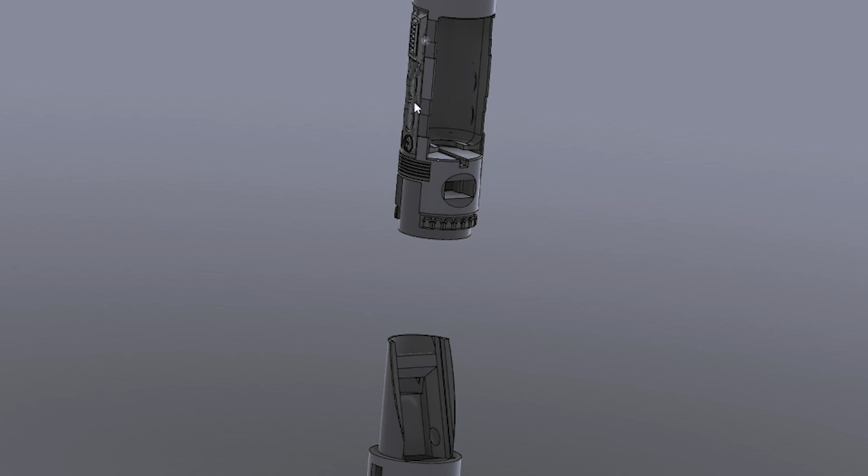So we're going to come into Fusion and talk about the chassis really quick, and then of course we will come up top and do a demo. Okay, so here is the chassis. Yes, that is the whole chassis. And this upper part is not even the Proffie holder. Let's talk about the bottom first. This is where the Proffie board lives.

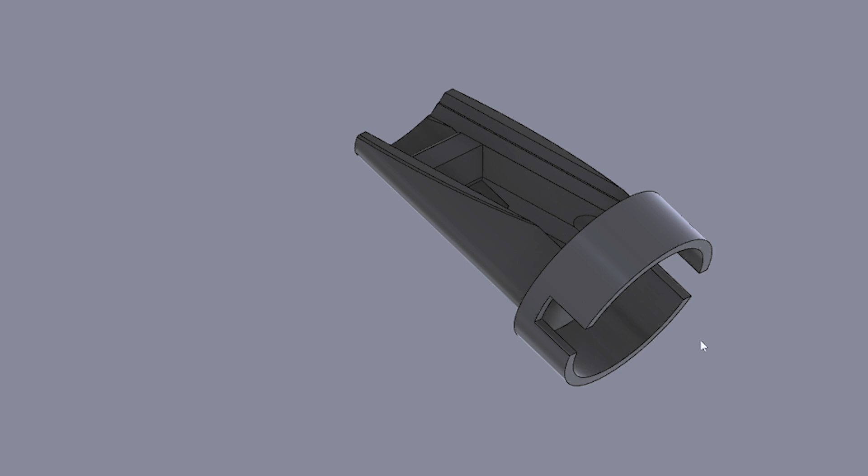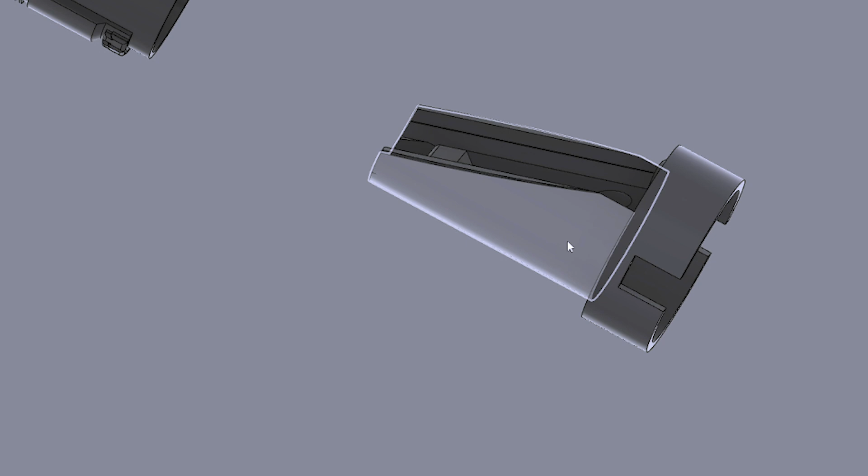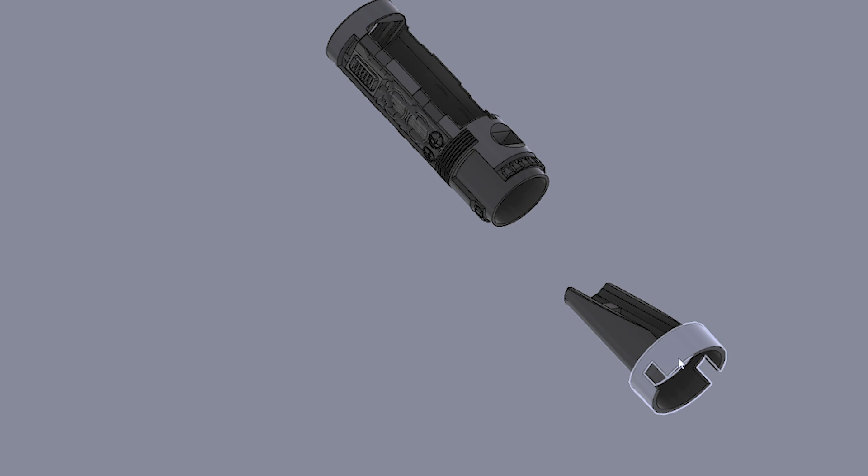One of my first concerns was having the board this close to the speaker. I was afraid we were going to get some false clashes, but to my surprise, after everything was installed, we don't get that. It works. It's very tight. This is the only amount of space that we have in the pommel area of the crystal chamber. You wouldn't be able to put a Proffie board up here; you just would not have room to stack it with a battery, and vice versa. A battery would not fit safely, in my opinion, in this bottom area with a speaker. So this is the solution I chose, and I'm pretty happy with the result. Very tight in this area.

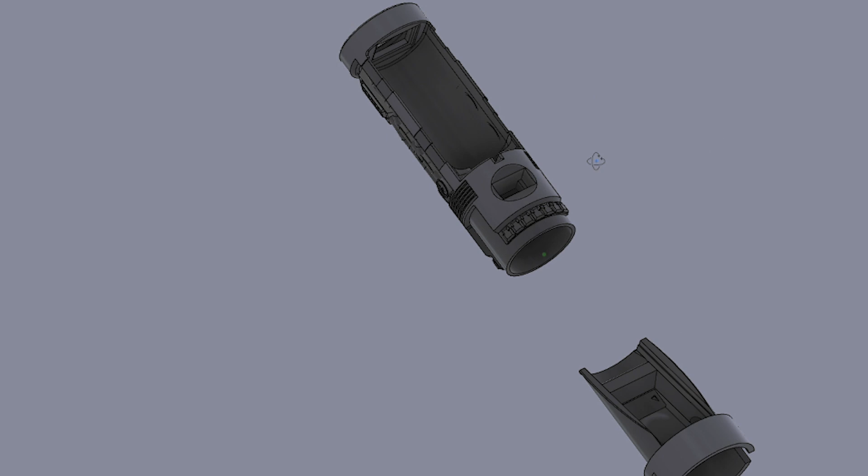So I wire up my Proffie, and I bring all of my leads past the exposed crystal chamber into the upper section of the hilt. These two indentations are where the chassis slides into the actual upper part of the crystal chamber. And then we've got our battery tray here. I did add a kill switch. Getting at the battery is not actually difficult, but because we have an open grip, I wanted to get a kill switch in that area so I wouldn't have to slide the entire core out to turn it on and off.

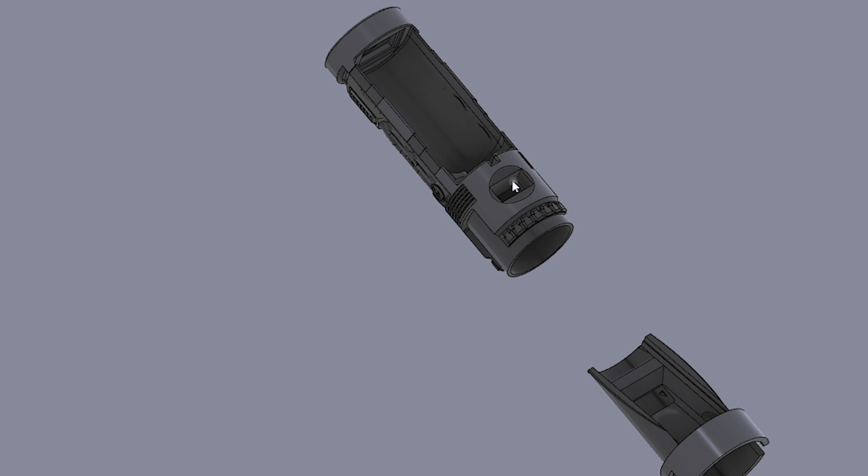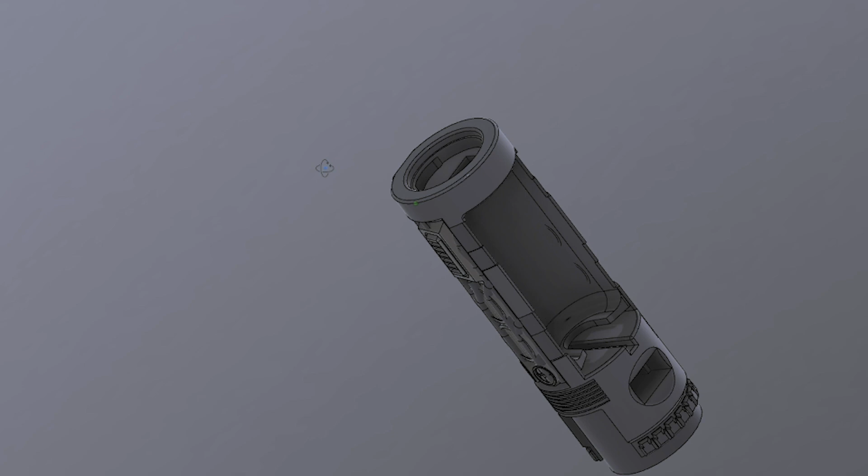We'll talk about this when we do an up close, but I put the kill switch up here, and if you lower the crystal chamber a little bit and slide it and twist it, you can hit the kill switch while it's still in the grip. Some greebly work along each side of the chassis, and then up top we've got a regular blade side PCB, basically a 3-rail PCB. And that's it. Very, very small chassis.

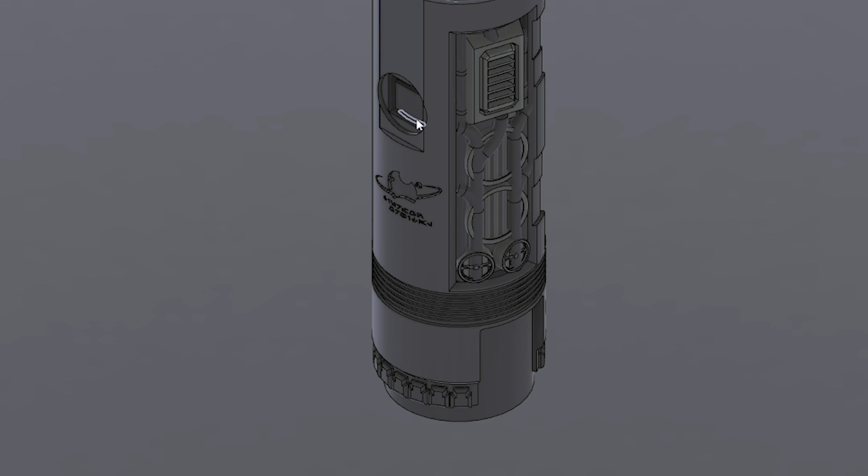Oh yes, and we do have one single tactile button on the chassis as well. This is what the plunger switch activates when you push the switch on the outside of the hilt. That's it. Very tight build. So let's come up top. All right, so here it is. This is the Unshielded from Shadowfoil Props. Super elegant hilt. This thing looks beautiful. It is a really good looking hilt.

Let's talk about the core first. Here is the actual core of the hilt, and this slides into the grip. When I was watching the disassembly video from Sam of Shadowfoil Props, to my surprise, the entire core comes out as one piece. So I wanted to take advantage of that and design a removable chassis system around it. Really beautiful crystal chamber.

The crystal is an acrylic crystal that came with the hilt. I left that in place as is. We've got some nice steel bars. All of this is brass, and this upper section is aluminum. Just a really awesome, elegantly designed crystal chamber core. I added my own extra, completely unnecessary twist.

I put an Edison filament, a warm white Edison filament, and wrapped it around that crystal just for some completely unnecessary blinky action because, you know, I'm me and I just like to be extra, right?

So here is where the Proffie tray sits, right? So I'm not going to pull this out. I did have to pop one single set screw in here that helps to secure that Proffie tray in place. Obviously, it is not completely removable because we have all of our leads going up through these tubes. Another really great design about this crystal core is that these tubes are hollow, right? So I brought all my leads up through these tubes.

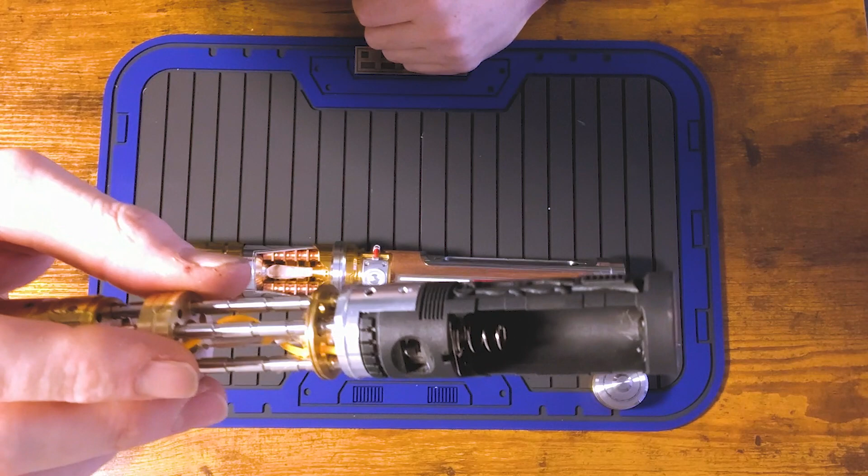And here is the upper section of the chassis. This is basically the battery holder, right? So I designed it around this aluminum part of the crystal chamber core. So it just slid down. And I actually did add a very, very small 1 millimeter set screw to hold that in place, right? And that's it. Really, really cool core solution.

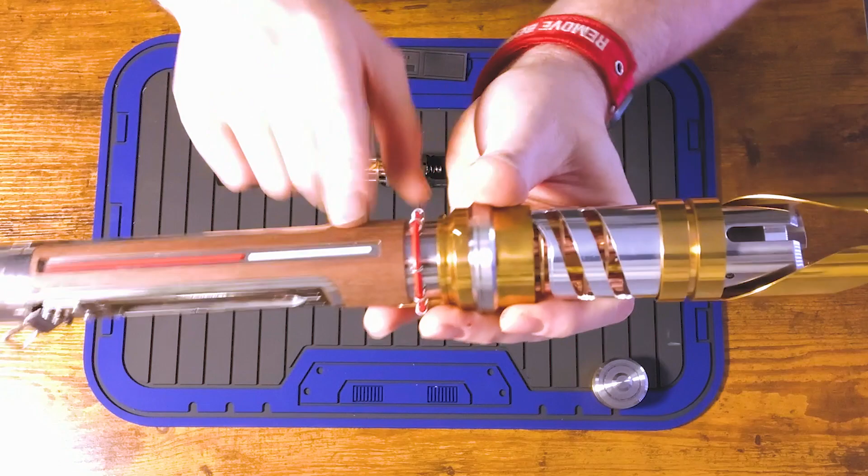All right, so here is the hilt. I mean, this thing's beautiful. It's very heavy. I believe it is, for the most part, all steel. I think this might be aluminum, but yeah, steel, brass, really awesome veneer here. So this veneer is very, very delicate. Sam does point that out in his walkthrough video. So yeah, it's just such a beautiful hilt. Okay.

And of course we've got some copper in the crystal chamber, and all of this is brass. Just a really, really nice hilt. Okay. So let's talk about how to use this guy. So this is an 18350 build. So let me find my 18350 battery. It seems like I've lost it. Okay, so here is my little baby battery. All right, so I'm gonna put that in my battery tray.

I'm gonna hit that kill switch, prepare to be blinded by that Edison filament, right? So it's probably washing out on camera. So this crystal is also independently lit. I have a 5 millimeter neopixel down here. I get these from KRSabers, and that was the only way I was going to fit a neopixel down here, was by using a smaller one. And up top is just a regular sized neopixel as well. Okay.

Yeah, you probably can't even see that on camera. It's so bright. So once I get my battery in, I line up. There is, I call this the smiley face greebly. There is a smiley face in this area. I line it up with this curved area of the grip. Slide it all the way in place until it stops. And then I put my pommel on. And then we're ready to go.